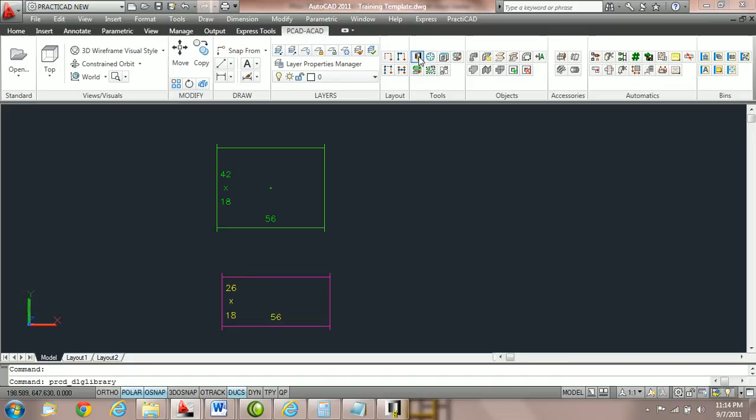On the left-hand side, we're going to click on the word Ductwork, and that is going to open up our Ductwork options. Notice here we have duct line placement, and we have two parts. The first part of these tutorials is going to be on the trace duct line placement, and the second part of the tutorial will be on the set by selection duct line placement.

What I'm going to do is uncheck the set by selection, and we're going to focus on the trace parameters. If these are checked, what PractiCAD is going to do is when I attach a piece of duct to an existing duct line, it's going to make the duct I am holding match the specification, the zone, the floor, and the system number properties. So here I'm going to hit the save key, and we're going to exit out of the library.

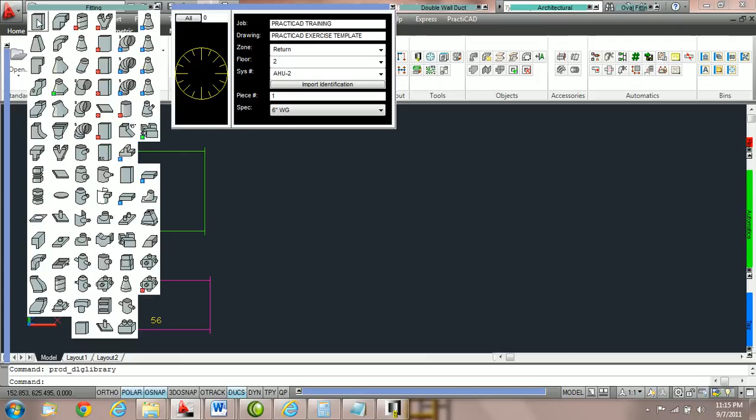Notice currently we're going to grab a piece of duct and we're going to snap to this duct line. If we look at the properties of this duct line by double clicking on the duct, you can see that the zone is supply, the floor is 1, and the system number is AHU-1. You will also notice that if I click on this ductwork, it's showing me the same properties in the property box because it's picked up the properties from the duct it was attached to.

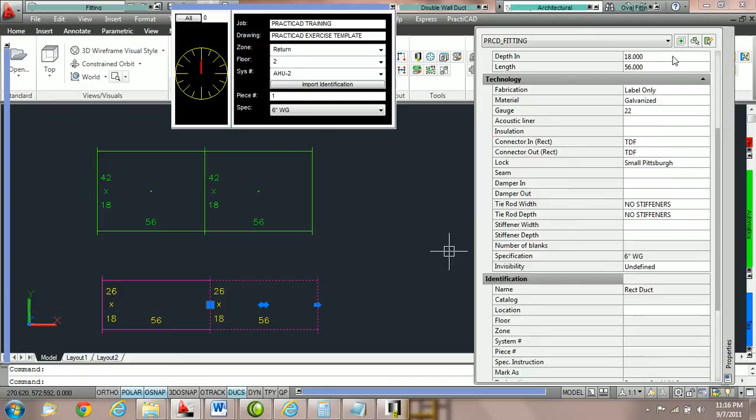However, if I go and grab another piece of duct and I decide to snap to this fitting, and then we look at these properties, you can see by the layer changing color that it's obviously picked up the zone and spec. You can see that that duct has picked up floor 2, zone return, AHU2, completely different floor, zone, and system number properties. And it's picked it up from the fitting we attached it to here.

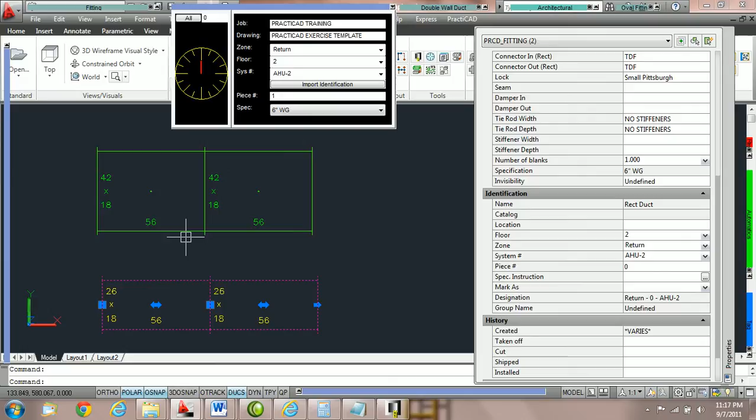So this is a very important option, and it's probably best to leave it on at all times. Once you've placed one fitting on the drawing with the proper specification, you can then move between fittings and you don't have to worry about changing the spec as you go.

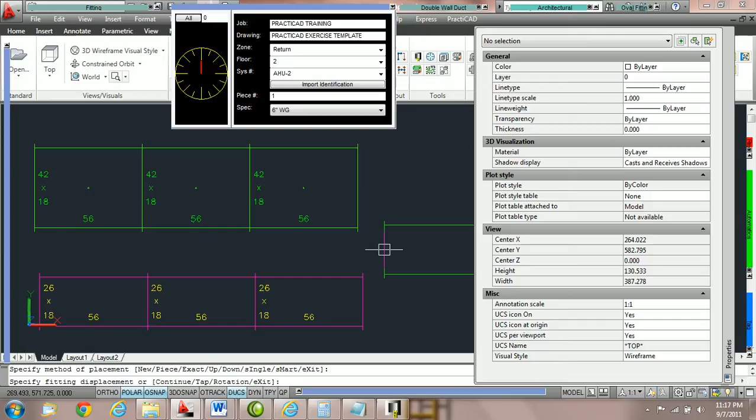For example, I'm grabbing a piece of duct. I'm going to click up top. You can see that it adds the tie rod, changes the color, the zone. You can even see the workbox updating the information. And then I'm going to click here and do the same thing down at this run without letting go of the duct, and you can see it's picking up all the proper information. That is how we use trace specification, zone, floor, and system number.

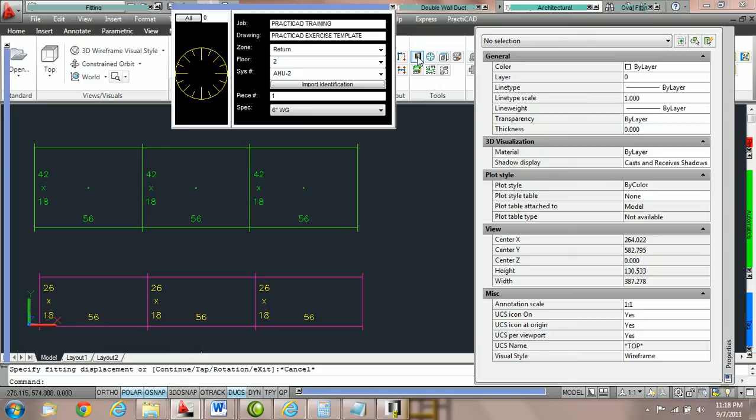In part 2 of this tutorial, we're going to explain how to use the set by selection parameters. We're going to go into our duct line placement options by clicking on the library icon in our PractiCAD ribbon bar. Now we're going to go over to the word ductwork and click on it so we get our ductwork options. And underneath duct line placement, we have set by selection. What this does when these are checked is PractiCAD will update the workbox and update the spec, zone, floor, and system number by matching the properties of whatever duct we click on.

To demonstrate this, we're going to uncheck the trace parameters and check the set by selection parameters. And we're going to hit save. Now we're going to exit out of the library.

Here we're going to change or update what spec, zone, floor, and system number we're working in by clicking on a piece of duct. Notice right now that it's set for return 2 AHU2. Those are the properties of the duct line on the bottom. If I click on the duct line up top, you can see that PractiCAD now updates the workbox to supply 1 AHU-1.

What this means when we have set by selection on, especially if it's on by itself, is PractiCAD will follow whatever's in this workbox. In other words, if I go to grab a fitting currently and I have set the workbox parameters by selection, and we use this fitting here, if I attach to the fitting down below, you will notice that this duct has not picked up the properties of the duct before it. That's because we unchecked the trace selection parameters. And now we're only following whatever we set by selection.

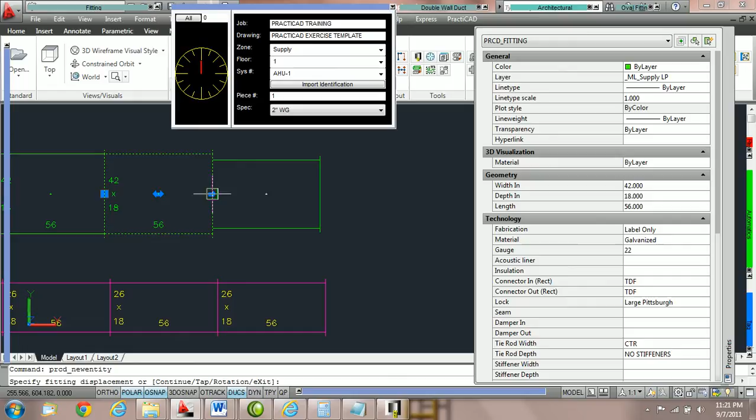If we would like to attach duct to the top and make sure it matches properties, we'd first click to make sure it updates the workbox, and then we would attach duct to it, and PractiCAD would follow all the proper settings for that duct line. It's following the settings in the workbox. So that is how we use set by selection.

Let's go back into the ductwork options by clicking on the library icon in the PractiCAD ribbon. The recommended settings for PractiCAD users is actually to keep all of these checked at all times. You can use the method you prefer, but it is recommended to keep all of these checked at all times.

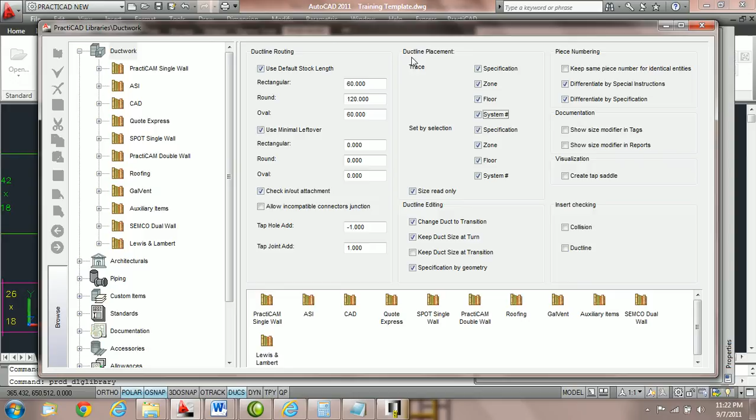However, having trace spec, zone, floor, and system number checked all the time can cause problems when you're trying to connect duct and switch specifications in the middle of the duct line. So there are exercises to go through, and I recommend you follow them, that show you how to switch specifications in the middle of a duct line. We're now going to save our preferred duct line placement options and exit out of the library, and that will conclude the tutorial on duct line placement options.